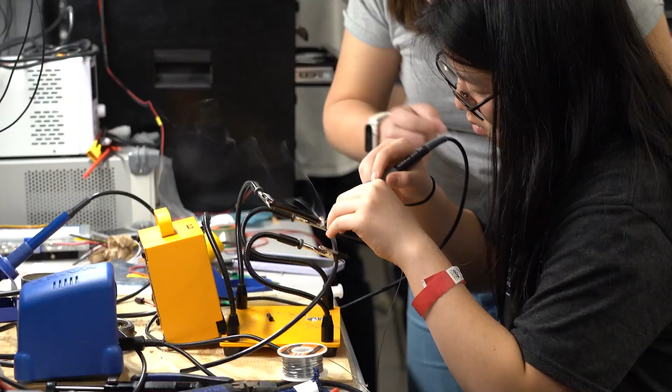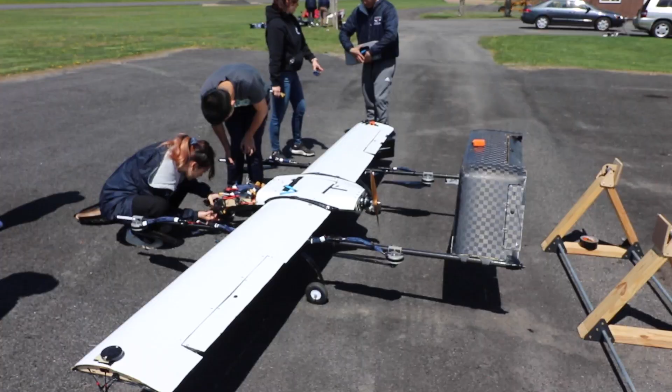Developed by over 50 undergraduate students from a variety of disciplines, the aircraft is composed of a custom fully composite airframe and includes 4 vertical propellers for VTOL functionality, a custom 2-axis camera gimbal, and a parachute drop system for payload delivery. CUAir is confident in Artemis's ability to efficiently and accurately achieve all SUAS competition objectives.

CUAir's 2023 flight line. Jack Williamson, Safety Pilot, Imaging Systems Lead, Class of 2024. Aidan Zamorsky, GCS Operator, Full Team Lead, Class of 2023. Owen Sorber, Imaging Ground Server Operator and ODLC Coordinator, Full Team Lead, Class of 2023. Polina Ermoshkina, Team Captain and Mechanical Supervisor, Full Team Lead, Class of 2024. Ibiyemi Abiodun, Imaging Plane System Operator, Imaging Systems Member, Class of 2023. Sean Yu, Airdrop Coordinator, Structures and Payloads Member, Class of 2023. Ashley Zhang, Electrical and Antenna Tracker Supervisor, Electrical Lead, Class of 2024. Eric Kim, Autonomous Vision Supervisor, Intelligent Systems Member, Class of 2024.

Time to fly with CUAir.

Acceptance criteria and design overview. The mission demonstration simulates a search, delivery, and rescue operation. Within the mission requirements, CUAir has established acceptance criteria for what the team deems a successful mission, and has determined system-level requirements for achieving these criteria.

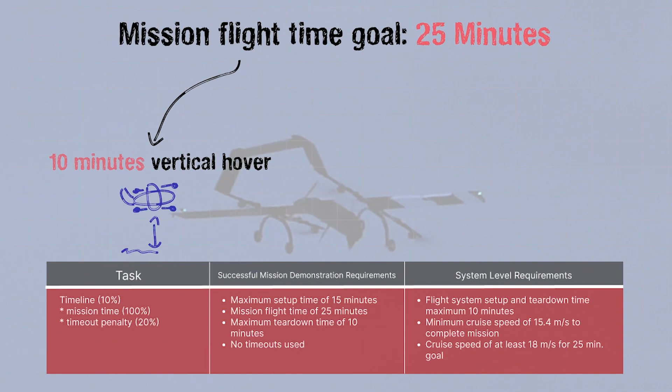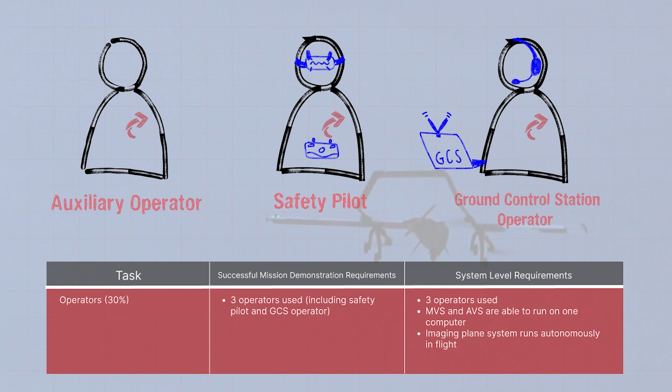For the timeline task, the team has set a mission flight time goal of 25 minutes to allow for 10 minutes in vertical hover mode and 15 minutes of horizontal flight, thus requiring a cruise speed of at least 18 meters per second. We also require that no timeouts are taken. We plan to use one other operator in addition to the safety pilot and GCS operator to earn as many points for the operator's category as feasible.

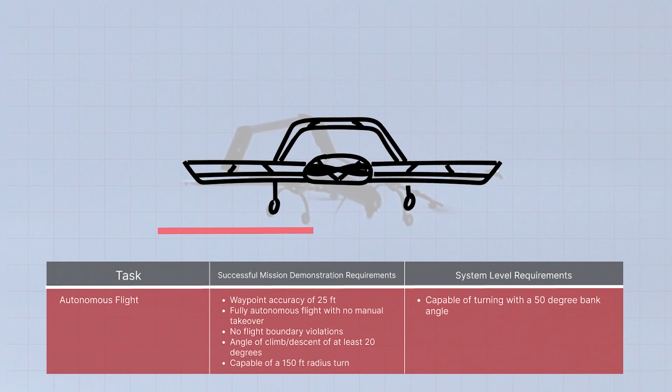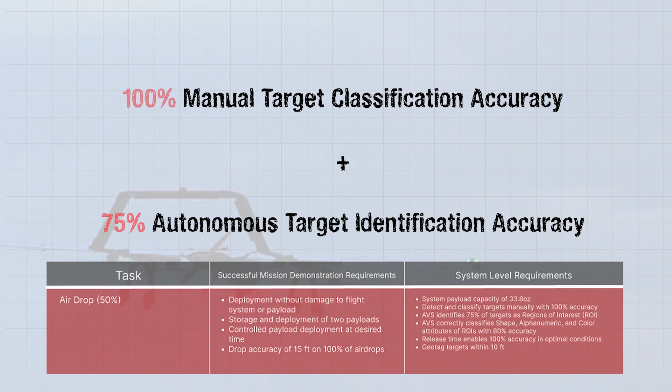To achieve SUAS flight requirements, our system must also be capable of fully autonomous flight and turn with a bank angle of at least 50 degrees. Successful airdrop will entail full points on both of our 2 payloads. To do so, we aim to classify targets manually with 100% accuracy, and for our autonomous vision system, to identify at least 75% of targets in images as regions of interest, and correctly classify at least 80% of these targets.

The hardware, electrical, and software systems of Artemis have been designed with these acceptance criteria in mind. 4 vertical propellers allow for VTOL, while a pusher propeller enables the transition to horizontal flight, and wheeled landing gear supports both vertical and horizontal landing. A custom 2-axis gimbal minimizes vibrations and allows for precise camera orientation. Payloads are delivered through bay doors in the fuselage.

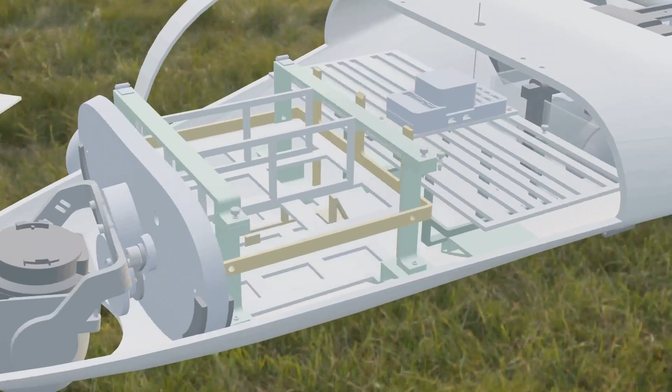The electronics bay, or E-bay, holds batteries, custom PCBs, and the Pixhawk Cube flight controller. The Pixhawk controls the plane's flight and the airdrop system. A Raspberry Pi Model 4B interfaces with the Pixhawk and controls the camera and gimbal system.

When images are captured, they are automatically geotagged and saved to the Imaging Ground Server, where an operator can manually identify objects or confirm classifications made by the Autonomous Vision System, AVS, then send the results to the autopilot system for airdrop. The AVS uses heuristics and machine learning algorithms to first detect regions of interest containing targets, then classify target shape, alphanumeric, and color.

To accomplish autonomous flight and waypoint objectives, we've created a custom version of the ArduPilot flight controller firmware. A custom web browser-based ground station built on top of the open-source MAVProxy ground station allows the operator to monitor mission progress and set mission waypoints.

Aircraft. At 2.22 meters in length and with a 3.67 meter wingspan, Artemis is CUAir's largest and most complex airframe to date. The system's 5 propellers are powered by 6 6S 8000 mAh LiPo batteries. The airframe is manufactured completely of composite layups consisting of a layered construction of carbon fiber face sheets and aramid honeycomb core to optimize its strength-to-weight ratio.

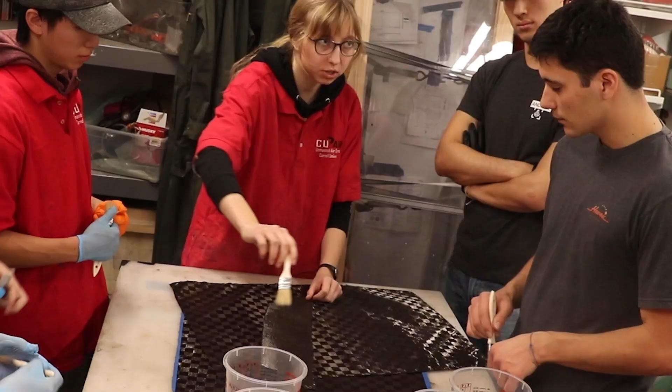In addition, the inverted U-tail design raises control surfaces out of the turbulence caused by the pusher propeller. To improve aerodynamics, the fuselage was created with a surface loft over a series of airfoils of increasing size from the wing root to its apex, making the fuselage a lifting body.

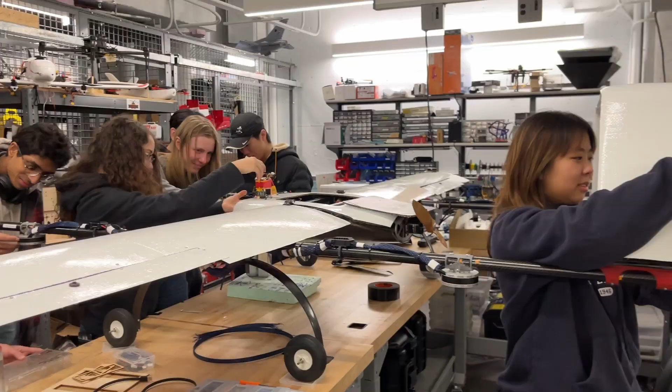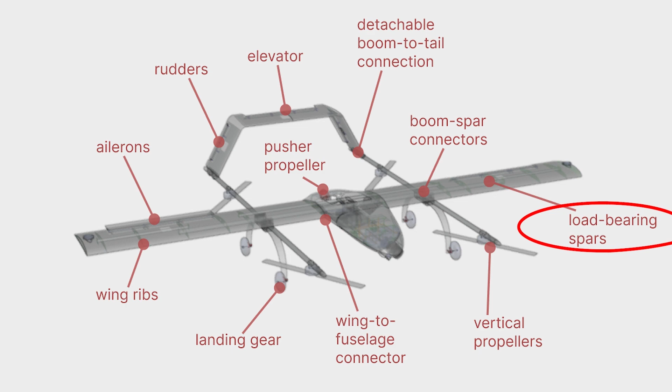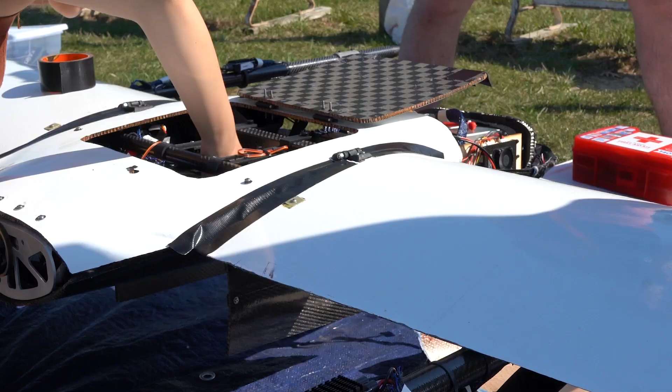Original designs utilized skis for landing, but the team decided on wheeled landing gear as an extra safety precaution to allow for horizontal landings in the event that vertical propeller control is lost. The team also changed airframe designs to allow for continuous spars through both wings, which support the wing load we required. In addition, the control surface materials were switched from balsa wood to 3D prints and carbon fiber to decrease weight and make the parts more manufacturable. Safety was also a major argument for developing a VTOL plane.

As demonstrated during a test flight in late March, vertical propellers allow the plane to safely descend if horizontal motor issues occur. Such contingencies were an important consideration when designing Artemis.

To verify Artemis's ability to meet all flight performance requirements, a variety of tests were conducted on both the ground and in flight. Materials testing for properties like tensile strength was used to determine the best 3D printing filaments and carbon fiber fabric to use for various parts of the plane.

A custom rig to test wing loading was also employed during developmental testing. Test flights were conducted to verify turn radius, flight time, angle of climb and descent, and runway space, and found that Artemis meets all requirements.

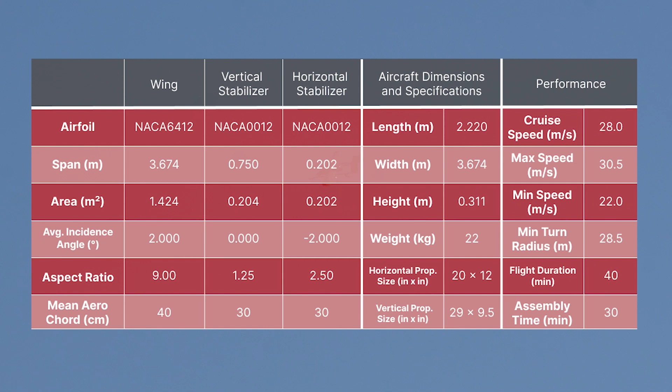A total of 32 flights were made, for a total of 1 hour, 59 minutes of flight time.

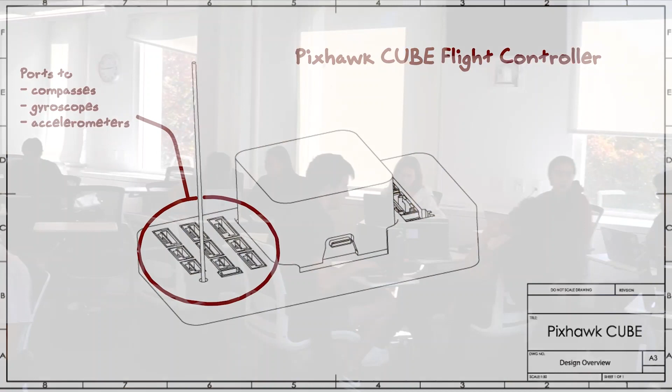Autopilot. The Artemis system uses the Pixhawk Cube flight controller, with a full sensor suite including compasses, GPSs, gyroscopes, and accelerometers for autonomous navigation. The team uses the open-source firmware ArduPilot for its robust developer support and for the inclusion of many essential flight features, such as waypoint navigation, VTOL flight modes, and robust failsafes.

The Cube runs modified ArduPilot 4.3 firmware, with additional features including support for our custom-made PCBs, and a custom payload drop algorithm enabling pinpoint airdrop accuracy.

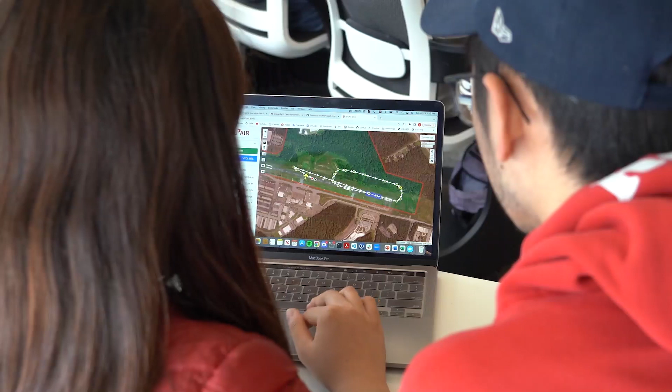CUAir developed a proprietary ground control system, or GCS, to enable convenient and simultaneous control of aircraft vitals, flight mission progress, and waypoint navigation. Centralizing live flight statistics and waypoint information in one interface is critical to our team's efficiency and success in the mission demonstration.

The GCS allows the operator to manually input waypoints during setup time, as well as during any point in the mission. The GCS operator also maintains the ability to terminate flight in accordance with SUAS safety requirements.

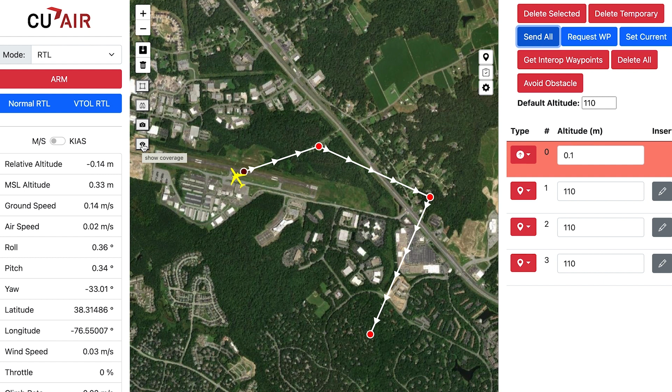Path planning algorithms were developed to autonomously create waypoints over the airdrop boundary as information is received on target geolocation.

Artemis's autopilot system was rigorously tested over 32 flights, with a total of 1 hour 59 minutes of flight time, with 1 hour 22 minutes in vertical and 37 minutes of horizontal flight time. Of these flights, 8 were autonomous, with an average of 2 minutes spent in manual mode per flight.

Waypoint navigation was also tested during these flights, with 80 waypoints hit out of a total of 87, and an average waypoint miss error of 17 feet.

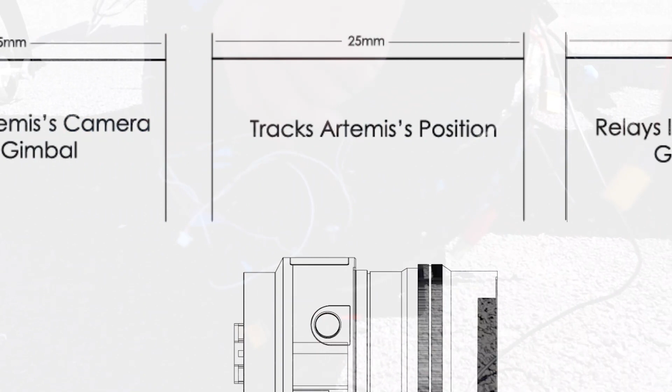CUAir's imaging system controls Artemis's camera and gimbal, tracks the plane's location, and relays image data to the ground server.

At the center of the imaging system is a Sony R10C camera, which has a 20 megapixel resolution and a focal length of 16 to 50 millimeters for zoom.

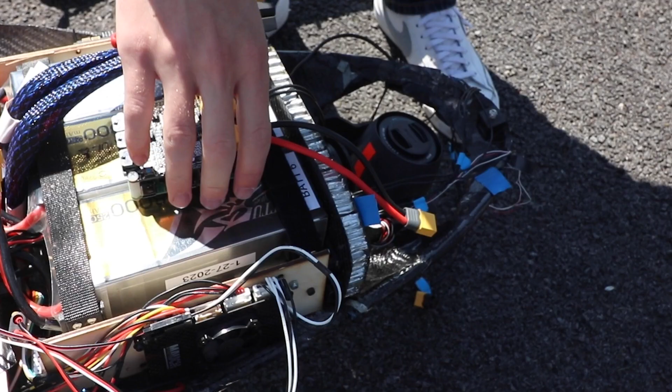Furthermore, a custom-built gimbal keeps the R10C facing perpendicularly to the ground to maintain uniform image perspective. A gimbal board communicates plane orientation data to the gimbal to ensure the desired angle.

To calculate the location of a ground target, Artemis uses current flight location and orientation information from the Pixhawk, as well as the target's position within the image.

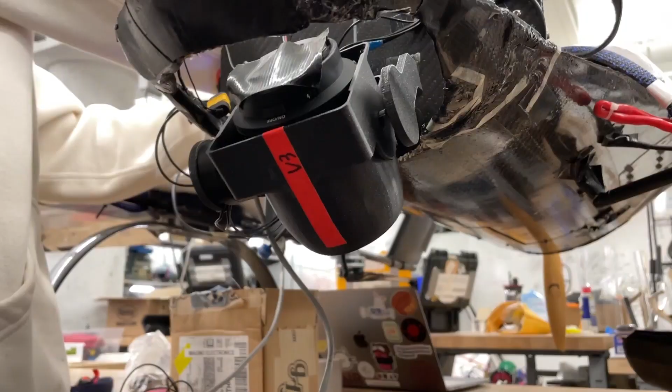Because this operation requires images and location data to be captured at the exact same time, Artemis uses a custom fabricated current sensing board to measure power draw from the R10C, logging the exact timestamp that a shutter click causes a spike in current. Once the ground server receives images, the Manual Vision System, or MVS, allows an operator to manually identify objects and assign each sighting to the corresponding water bottle payload.

Any repeat sightings in multiple images are merged into one target. Once an object is tagged on the UI, the MVS sends the correctly identified targets to the Autopilot GCS for utilization in the airdrop task.

The tagging procedure can be time-consuming, so CUAir has designed an Autonomous Vision System, or AVS, to detect and classify objects autonomously. The AVS receives images from the imaging ground server and starts by detecting ROIs using the MASK RCNN algorithm. Once an ROI is identified, UNet segmentation generates a shape segmentation.

Further algorithms use these contours to classify the target's shape, alphanumeric symbol, and colors. If the resulting classifications have high confidence levels, the ROIs and their classifications are then sent to the MVS to provide tagging assistance to the operator.

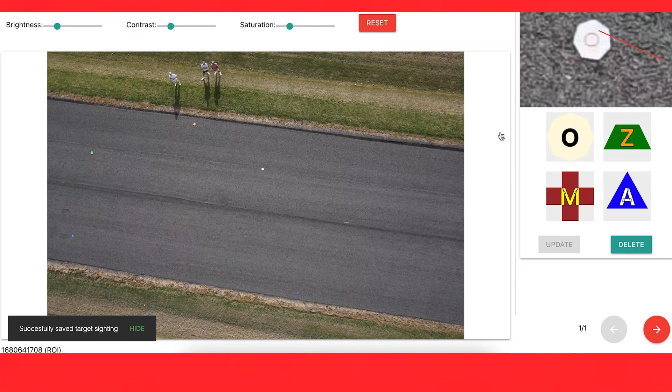Our imaging and ODLC systems underwent significant developmental testing on both Artemis and testing platforms. Developmental testing was conducted on 60 target sightings using our DJI Matrice test platform over several flights. The average geolocation error was 11 feet, with a standard deviation of 3 feet, and 90% of targets geolocated within 15 feet.

When tested on Artemis with gimbal and current sensing board capabilities on 44 target sightings, our performance improved to an average geolocation error of 7 feet, with a standard deviation of 3 feet, and 100% of targets geolocated within 15 feet.

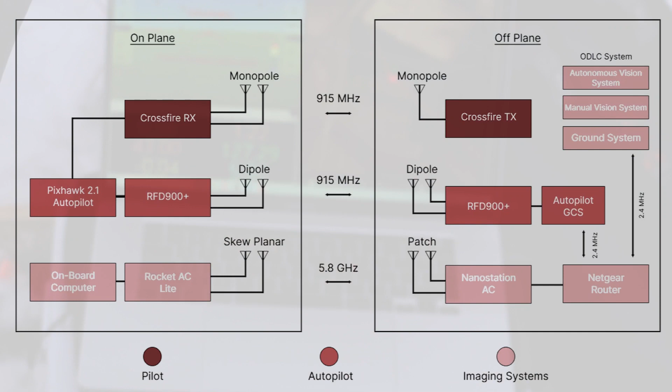Artemis's communication system allows operators to send instructions, receive data, and control the plane system. The GCS passes MAVLink messages with the plane over a 915 MHz frequency for telemetry data and commands.

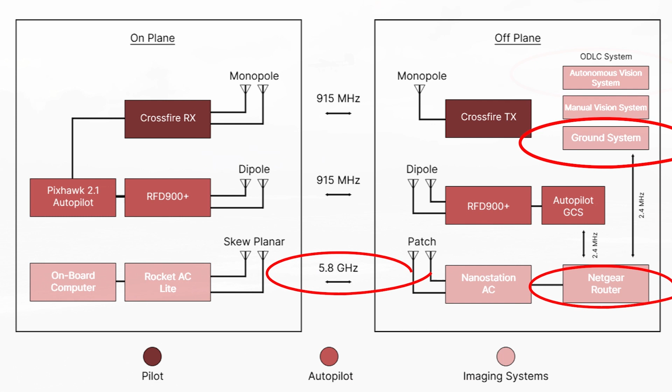A separate router and 5.8 GHz Wi-Fi network is used to send images from the plane to the imaging ground server and the AVS. The router connects to the GCS as well as the nanostation, a transceiver mounted on the antenna tracker that communicates with the Rocket AC on the plane, so that all computers are connected over Wi-Fi.

Tests were conducted on the communication system to test Wi-Fi range and throughput capacity. On average, the nanostation and Rocket were able to communicate with each other in Artemis flights with a throughput capacity of about 100 megabits per second.

The Wi-Fi system was stress tested at up to 1 kilometer, and sufficient throughput capacity was observed. On board Artemis, approximately 97% of images sent to the ground were received, with a median send time of 300 milliseconds, indicating low packet loss.

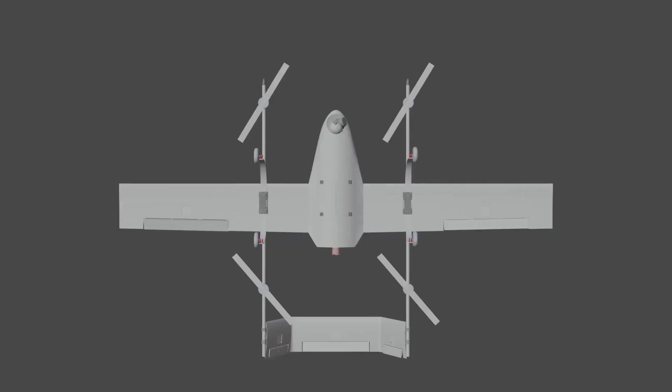Artemis's modular airdrop system carries 2 payloads, each housed in a 3D printed chamber and secured with easy-to-remove Velcro straps. Bay doors on the underside of the fuselage are opened and closed with a servo, and a pin mechanism controls payload release. During airdrop, the autopilot software commands a custom airdrop circuit board to open the bay doors and release the appropriate pins. To control the descent, each bottle chamber has an electronically controlled parachute release mechanism to guarantee consistent delay for parachute deployment. Optimal drop time is calculated by autopilot using aircraft speed and wind direction.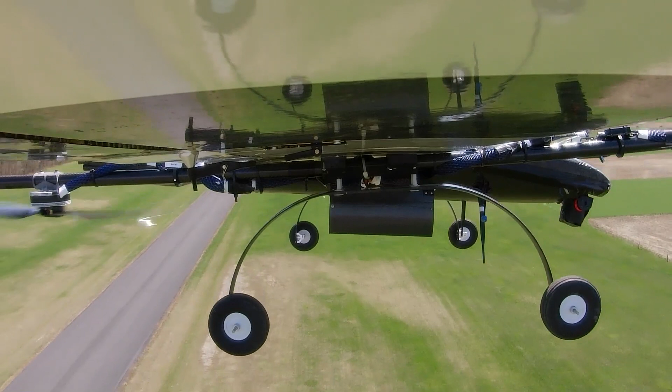Several alternatives were considered when designing the airdrop system. One suggestion included a winch mechanism to lower payloads to their target while hovering overhead. However, this would require more vertical flight time and increase aircraft weight. A drogue chute specifically folded to delay opening was also considered, but this was proven to be inconsistent during testing.

In addition, although the fuselage has the capacity to hold up to 4 payloads, the team ultimately decided to only attempt 2 drops to reduce overall weight and mission time.

The team tested the airdrop system on smaller RC planes to fine-tune drop mechanisms and develop a model for calculating optimal drop time. A GPS mounted inside a bottle was used to test drop accuracy and provide more data with which to create the model.

The team dropped 21 payloads, and the system released the payload 84% of the time. In tests on Artemis, the payload landed a mean distance of 9 feet from the target location, with a standard deviation of 3 feet, and 90th percentile distance of 16 feet. 83% of drops were considered successful by mission requirements. All payloads remained intact upon landing and were easily retrievable.

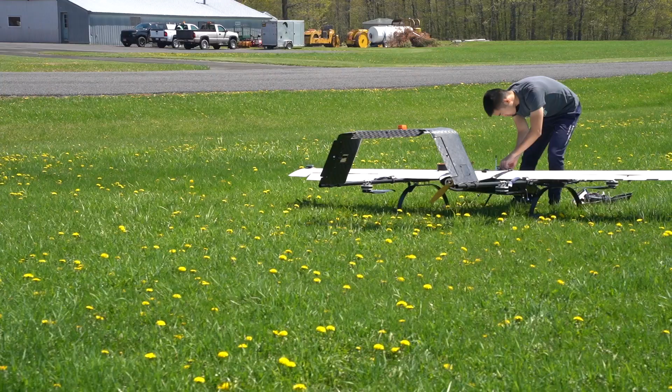The team decided to implement a button on the autopilot GCS that allows the GCS operator to command the aircraft to autonomously avoid any upcoming obstacles.

The stream of an FPV camera on board Artemis would display the perspective of the plane on the GCS. In the event of an upcoming potential collision with another aircraft, the operator will be alerted and will command an update of the waypoint path to perform evasive maneuvers. Pressing the avoid button will autonomously divert the aircraft to a new path to avoid a collision.

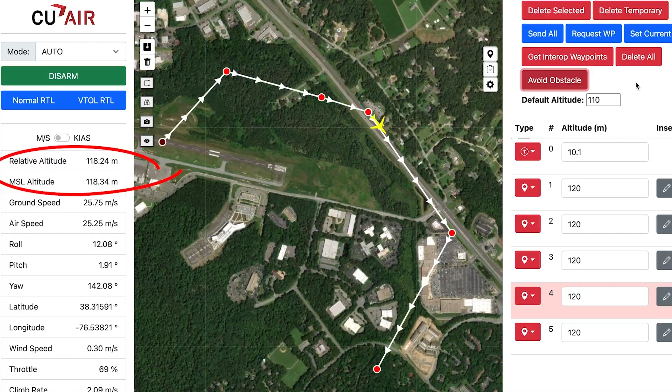The team initially considered devising an autonomous obstacle avoidance system based on utilizing radar detection of other aircraft, but decided this would be very complex to implement and opted for our current system instead.

Artemis's waypoint-based obstacle avoidance system has been tested with a total of 10 avoidances in 10 different simulations, successfully achieving an average course redirection of 10 meters in 5.5 seconds. Given our measured waypoint accuracy, we are confident in Artemis's ability to avoid all other systems at competition.

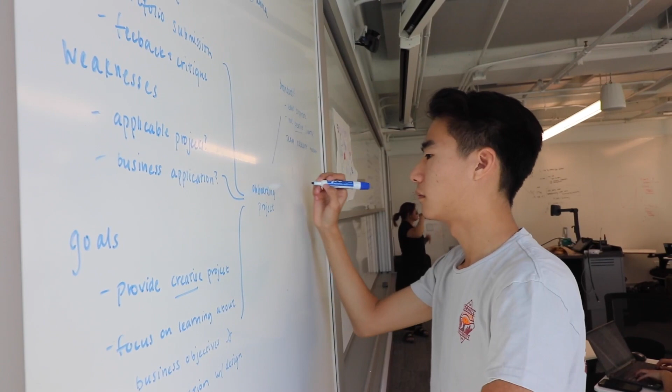The team proceeded to employ full mission tests to assess the performance of the integrated Artemis system at achieving each of the mission objectives. CUAir conducted 1 full mission test and estimated scores using the rubric provided in the SUAS rules. For the timeline portion, the team scored an average of 26%, taking on average 15 minutes to set up and 22 minutes of flight time. The team expects a similar time at competition.

CUAir transposed multiple loops of last year's competition waypoints over our local airfield to simulate the waypoint requirements of the mission. Waypoint navigation and autonomous flight were achieved reliably, as they were in developmental testing. Since mock payloads were used in developmental tests, there were few aerodynamic changes to the integrated system, and thus no corrective action was required to improve performance. The team expects similar performance at competition.

Manual ODLC with autonomous aid was performed in all full mission tests with full success, with only 3 operators needed. Air delivery was tested with an average score of 40%. The team expects similar performance at competition.

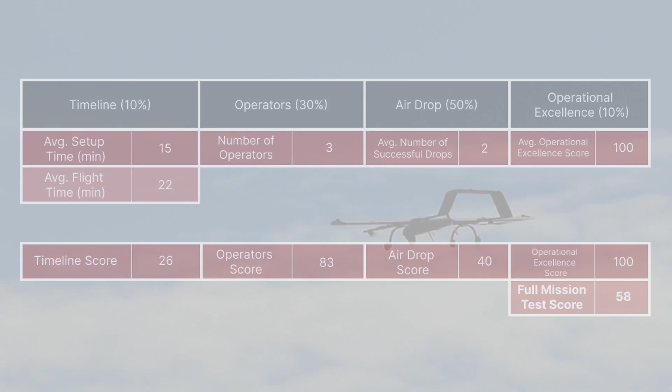The full mission test score was 58%. CUAir has demonstrated that it can operate safely and professionally during the mission, and hopes to achieve full marks for operational excellence. CUAir expects to score approximately 58% of total mission points at competition.

We'd now like to show you Artemis in action. Please direct your attention to our proof of flight.